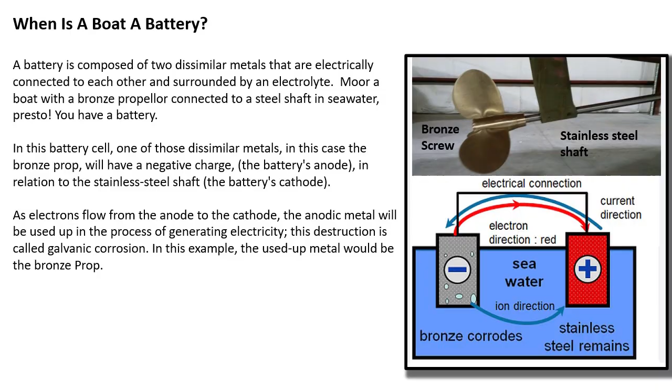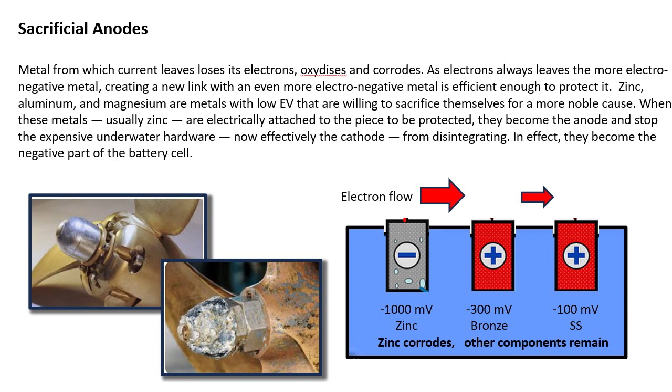The R43 has 6 of these protective anodes, all made out of zinc. There's a round zinc on each of the 2 trim tabs, a zinc on the exhaust port on each of the propulsion units, and then 2 transom zincs.

The recommendation is that they should be checked often and replaced roughly every 6 months, or depending on how quickly they're eroding. When we got our boat, after about 7 months in the chuck, all of the zincs were pretty deteriorated, so we ended up replacing them at that time.

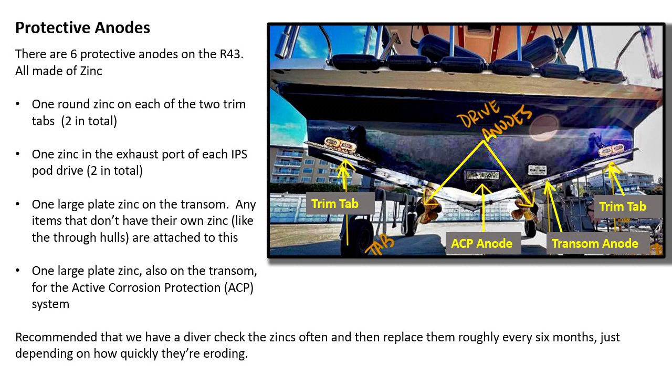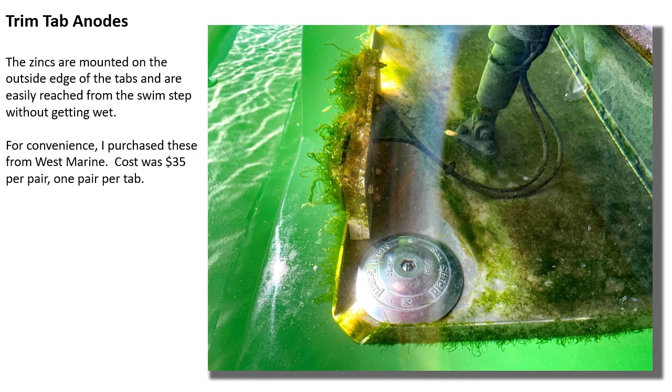The trim tab anodes are mounted on the very outside edge of the trim tabs. They're relatively easily reached without getting wet—just lay down on the swim step and you can reach over and access these.

Each of the drive units has an anode located in the exhaust port. This is a relatively tight space, and the diver reported that it wasn't very easy to get these out, requiring an extra long Allen wrench to do that.

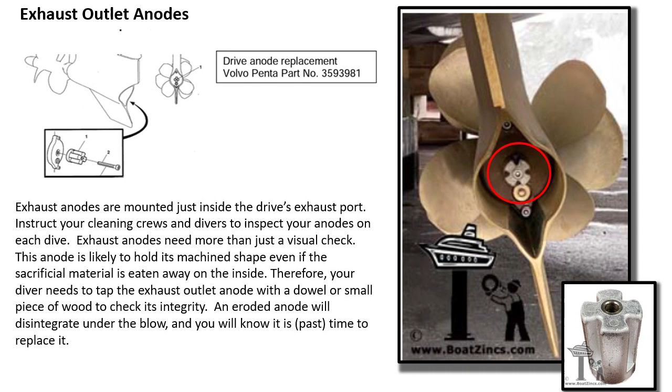There are 2 large plate anodes located on the transom of the R43. The lower one is the backup anode for the ACP, the Active Corrosion Protection System. The other diver plate is for any items that don't have their own specific zinc, like the through hulls. Shown here also are the part numbers for both of these items.

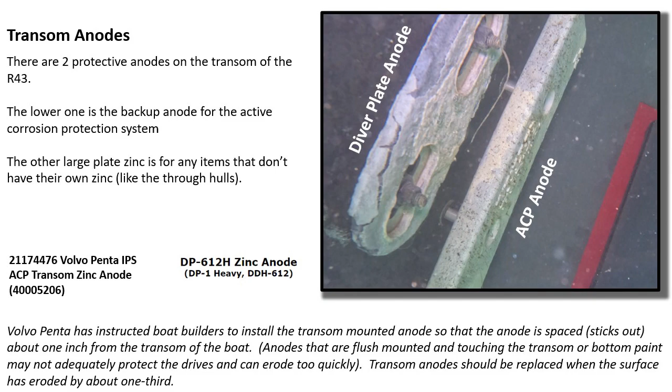Our Volvo IPS drives have something called an Active Corrosion Protection System. It works by injecting a current into this galvanic cell system, automatically measuring the existing currents produced by the dissimilar metals in the water, and then producing a countercurrent to effectively oppose that. Supposedly this eliminates the need for sacrificial anodes on the drive, even though we have a large plate backup zinc and zincs in the exhaust ports.

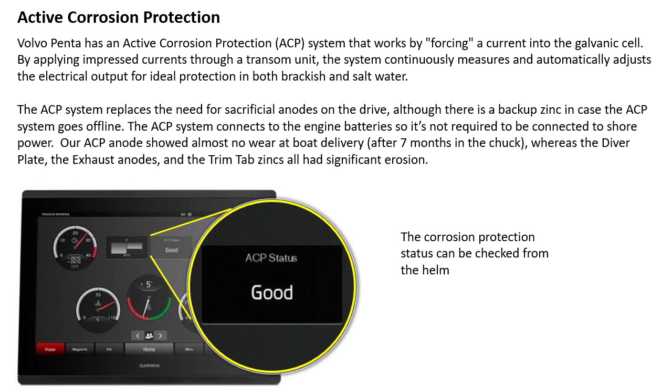I'm just going to talk about a few things here—cleaning the seawater strainers and flushing the seawater lines. I want to draw people's attention to the As the Prop Turns webinar that Tim Bates put on about spring maintenance. He's got some really good descriptions on things like changing the primary and secondary fuel filters, so rather than trying to reproduce that, I'll refer people to that particular YouTube session.

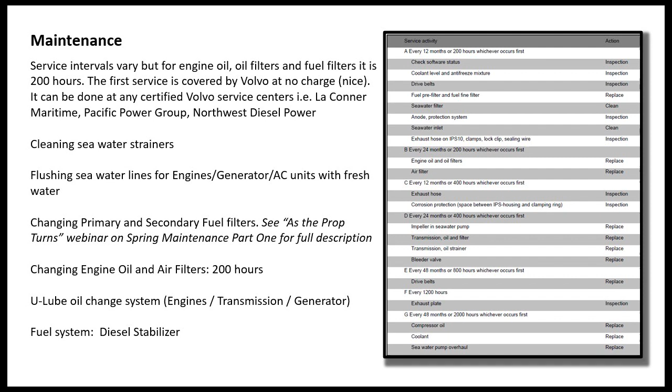We will be talking just a little bit about one of the differences between the R41 and the R43, which is this U-lube oil change system. We'll cover that here in just a little bit.

There are 4 seawater strainers on the boat. 2 of them are on the engines, and then there are 2 that run to the AC units and to the Westerbeke generator. They all are fairly easy to clean.

You remove the retaining metal band and pop the plastic lid off, and then you can pull out the strainer basket from the bucket. The strainer basket can have seaweed and other bits of debris in there, so clean that out and then replace it back into the bucket.

There are 2 metal pegs in there that fit inside 2 holes in the strainer basket, so line those up and you can be sure that you've got the right orientation for that strainer basket when you replace it.

It is recommended that you, on occasion or frequently, flush the raw water systems, the systems that use raw water for cooling, with fresh water.

So the process is pretty simple. You close the valve on the input seawater cock, then open up the lid to the seawater strainer, and you can put a freshwater hose in there and get that started, and then start whatever unit you're trying to flush, the air conditioning units or the engine or the generator.

Run that for several minutes to get water through there, and then turn it off. And don't forget to open the valve back up again when you're done.

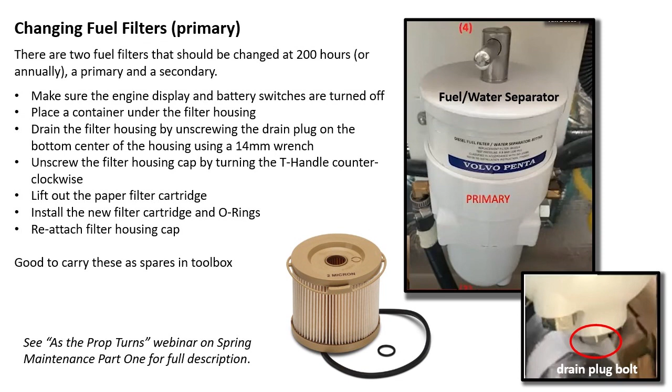So there are 2 fuel filters per engine that need to be changed at the 200-hour or annual interval. There's a primary filter shown here with the white canister and the T-handle on top, mainly designed to separate water from the fuel. Then there's a secondary filter after that, a smaller one painted green, and it also has a water sensor in it, but it's designed to remove some of the finer elements that might be in the fuel.

Changing these has a really nice description in the webinar that I mentioned before, so I'll refer people to that rather than trying to duplicate it here.

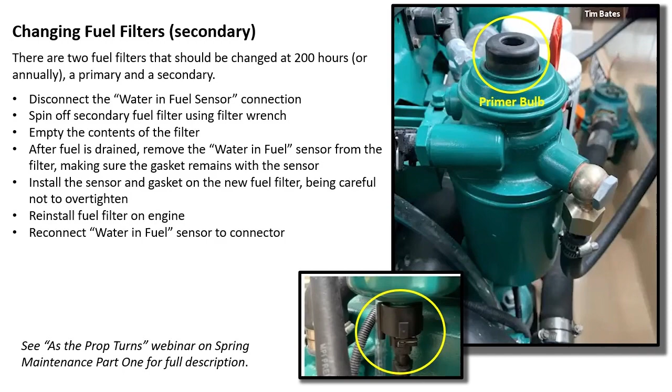One of the differences between the older R41 and the new R43 is this U-lube oil change system. Now you've got the ability to do all your oil change service right there while the boat's sitting in the water. So you can change not only the engine oil, but the transmission drive oil as well. There's no need to haul the boat out of the water to do those services.

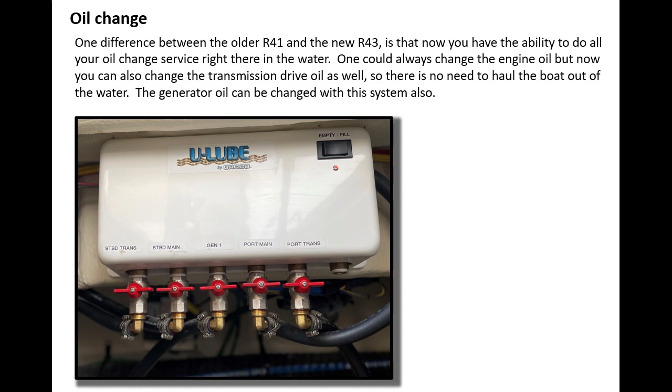Also, the generator oil can be changed with this system as well. There's a hose that runs to the drain pans in each of those units. Turn the switch, the valve, and once the pump goes, it starts sucking the oil out of that particular unit, and then goes to an exit hose, and you've placed a bucket underneath that exit hose to collect the drained oil, and you can do that for all of these systems.

There are 2 spin-off oil filters on each of our engines. Now these have different part numbers and different hole sizes, so make sure you get one of each, and as well the air filter. Those are items that also need the 200-hour interval between changing.

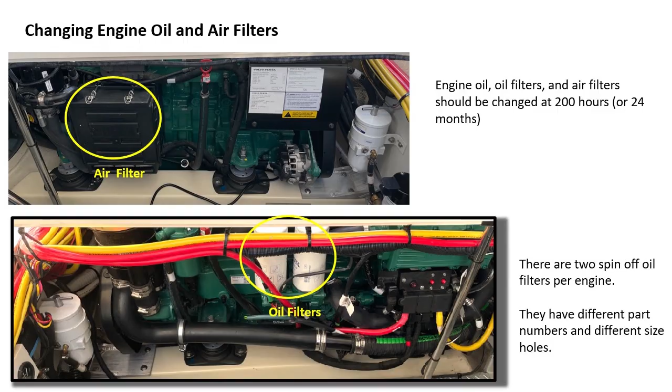The drive oil and filters have a little bit longer service interval. They're every 2 years or 400 hours.

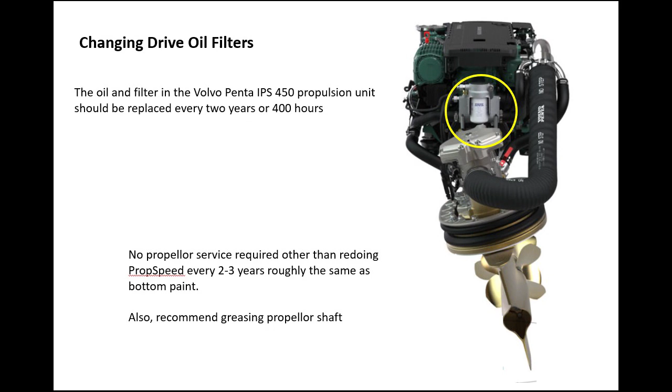The propeller system does not really require any service, but every 2 or 3 years we'll probably be pulling it out to redo the bottom paint and the PropSpeed. At that time, they'd recommend we take off the propellers and grease the propeller shaft as well.

There's quite a large stack of manuals for each of the systems installed on the boat. One of which is this nice hard copy IPS Operators Manual that has some very good information in it, and even more on how to do service and maintenance you can get in a handbook that you can download at the Volvo website as well.

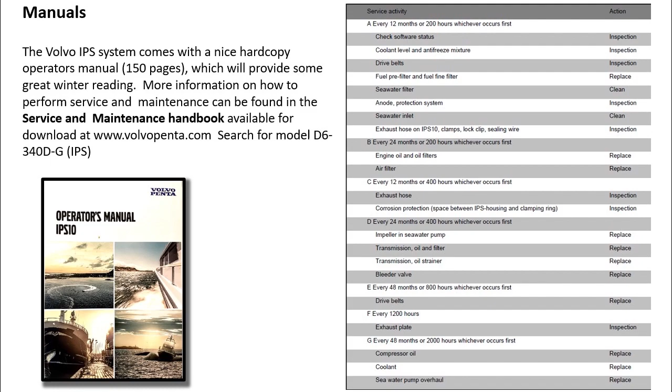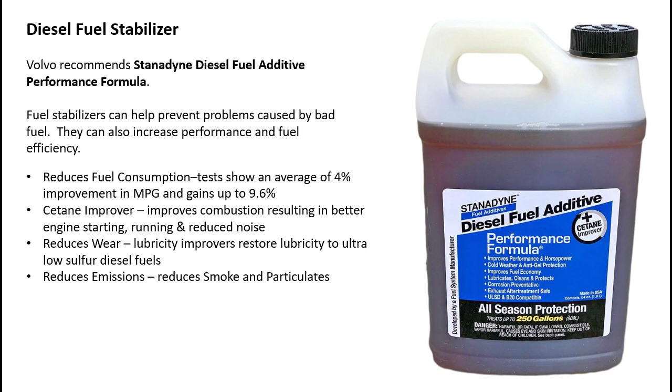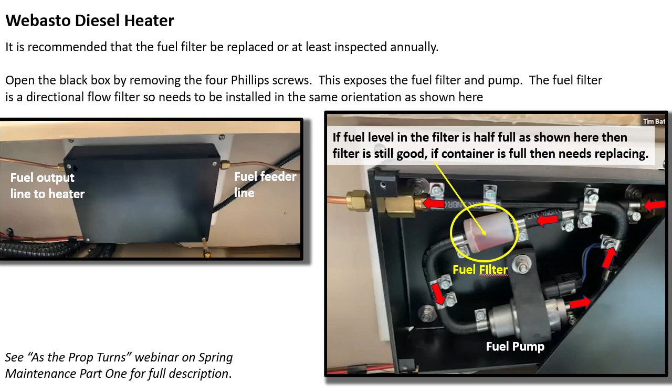One of the options available is to add a diesel heater unit to the R43, and we did that. We have two, one for the guest berth and one for the master suite. There are some maintenance items associated with these, so we should check the fuel filter at least annually and replace it if necessary. The fuel filter and fuel pump are contained in a black box located in the guest berth behind the wall panel. Once opened, you can check the fuel filter: if the fuel level is up to about halfway, the filter is still good, but if the canister is full of fuel, the filter element is starting to get blocked and needs to be replaced.

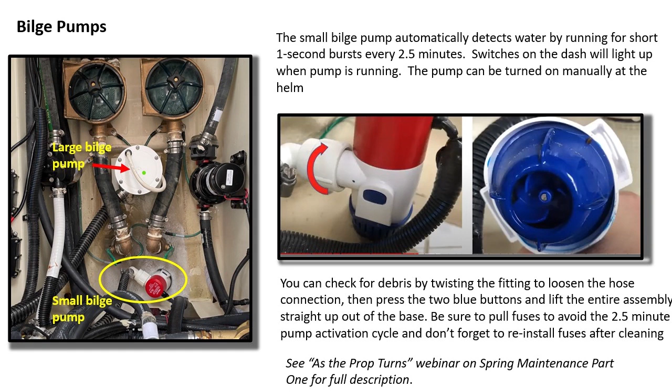The bilge pumps probably don't need a lot of maintenance, but they can accumulate debris inside the pump itself, so it's not difficult to unhook these and inspect the interior. There's a process for doing that which Tim describes in the webinar.

Kenny spent some time with us going over the systems we'd covered on days 1 and 2, and we had some residual questions for those. He also took us through some of the systems we hadn't talked about yet.

For example, the refrigerators. It seems like we have an ample supply of cooling power on the boat. There are 4 refrigerators, 1 freezer, 1 ice maker, and 1 wine cooler, all of which will run on DC 12-volt power when the house switch is on. Some of these will also run off of AC as well.

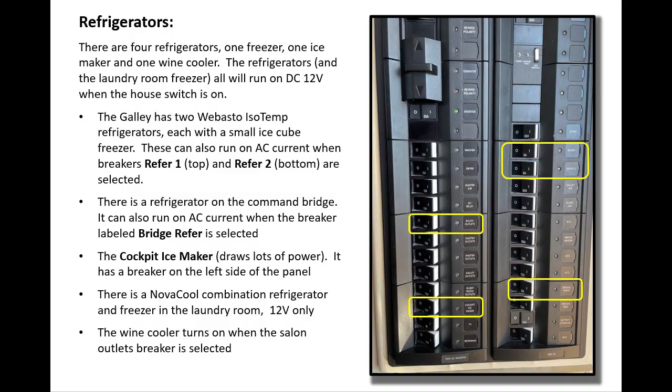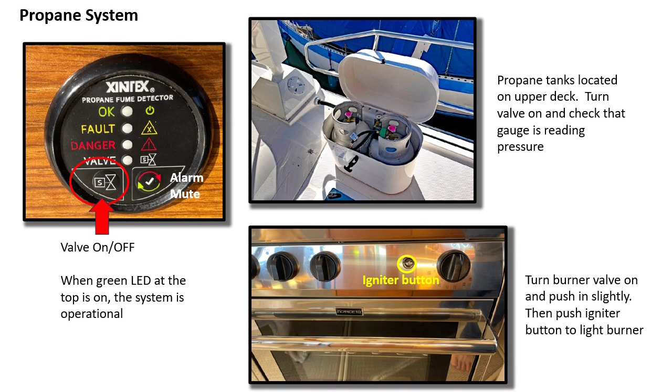The R43 comes with a 3-burner stovetop and oven that runs on propane. The propane is located in two large tanks in a hatch on the upper command deck. To operate this system, turn on the valves at the tank, come back down into the galley, and turn on the solenoid using the button on the fume detector. Then to ignite the burner, turn one of the burner knobs counterclockwise, hold it in, push it in a little bit, and press the igniter button.

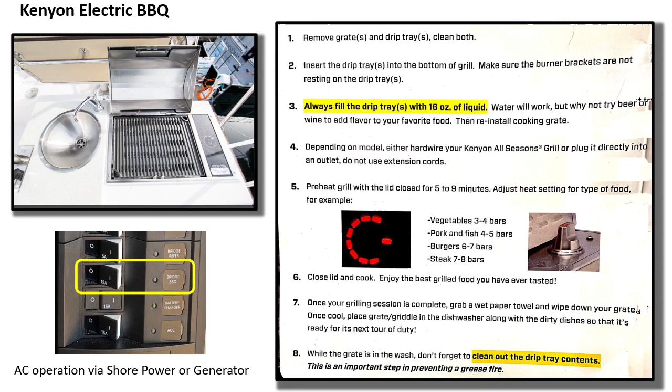The R43 comes equipped with one of these cool electric barbecue units, ours located up on the command bridge. We never used the one we had on our R27, mainly because we didn't have a generator, but now that we do, I can see this being used a lot more often.

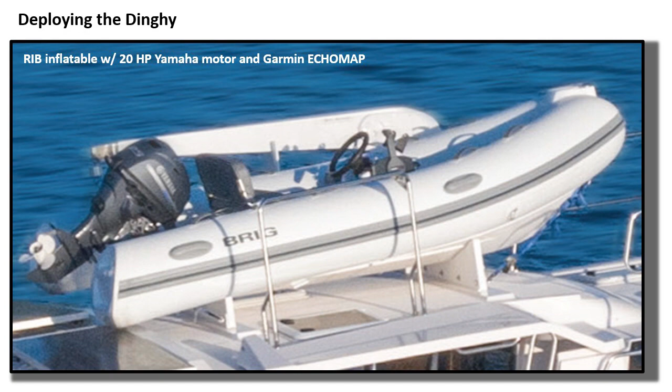It was a pretty miserable day when Kenny was going through our instruction. We did have one calm period, which we took advantage of for him to show us how to launch the dinghy. The process begins by taking the cotter pin from the lock bar and sliding that bar out of the tube, then raising the davit up to the lifting position, reinserting the lock bar into its new hole, and reattaching the cotter pin.

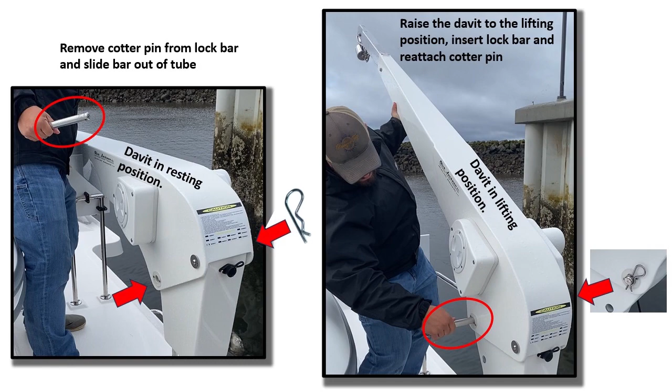The next step is attaching the electronic hand controller to the davit via a plug on the side. Then you can manually swing the davit over the top of the dinghy and lower the carabiner until you can clip it into the 3-point lifting harness. Once that's done, then you can...

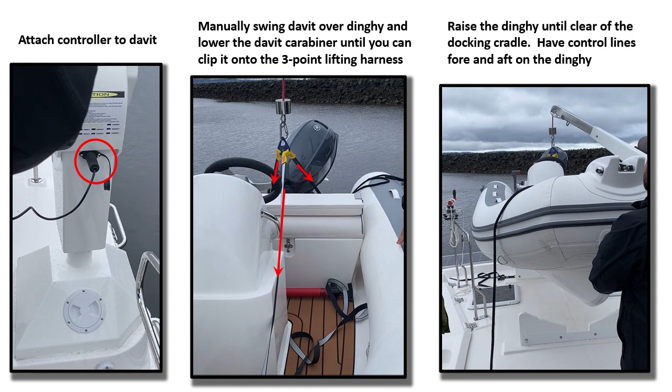Use your electronic controls to raise the dinghy until it's clear of the docking cradle, then attach control lines fore and aft on the dinghy. You can manually rotate the dinghy perpendicular to the boat so it's clear of the davit's resting stanchion, allowing you to swing it out over the side. While controlling its orientation with the guide ropes, you can lower it back down into the water.